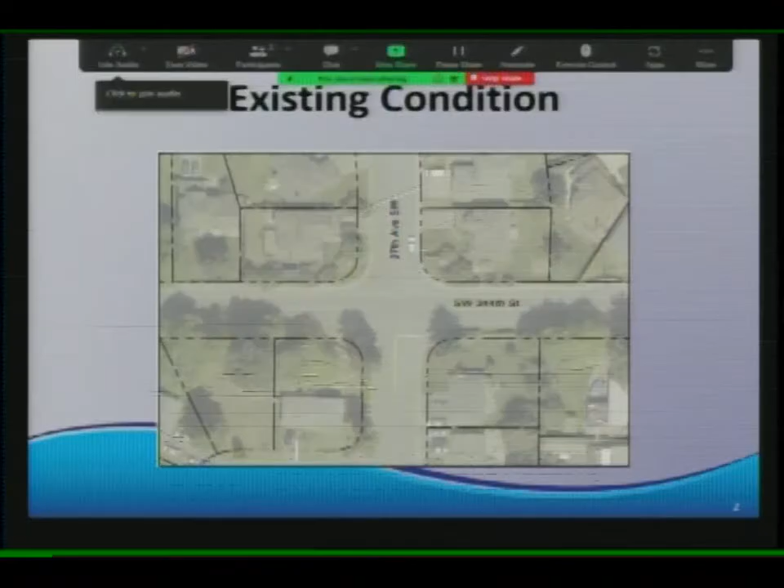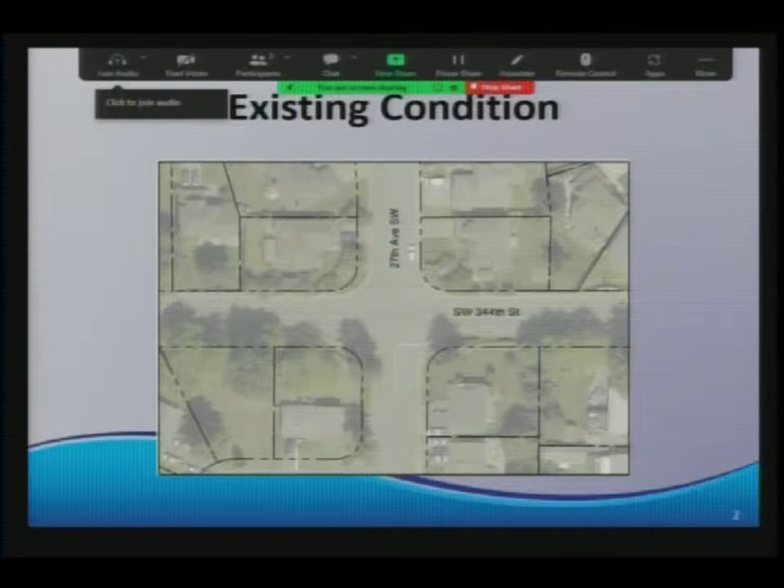This project is to construct a compact roundabout at Southwest 344th Street at the intersection of 27th Avenue. This is our existing condition: east to west, 344th is not stop controlled; north to south, 27th Avenue is stop controlled. We have a lack of marked crosswalks. We do have wheelchair ramps, but they're not ADA compliant as it stands today. We also have one street light, making visibility at night rather difficult.

This is our proposed condition. The very first thing we notice about the roundabout is the chicaning of the travel lanes, which will help slow down and control vehicle speeds entering the roundabout from all directions. We have marked crosswalks, compliant wheelchair ramps, and we also plan to add street lighting to increase visibility of the intersection at night.

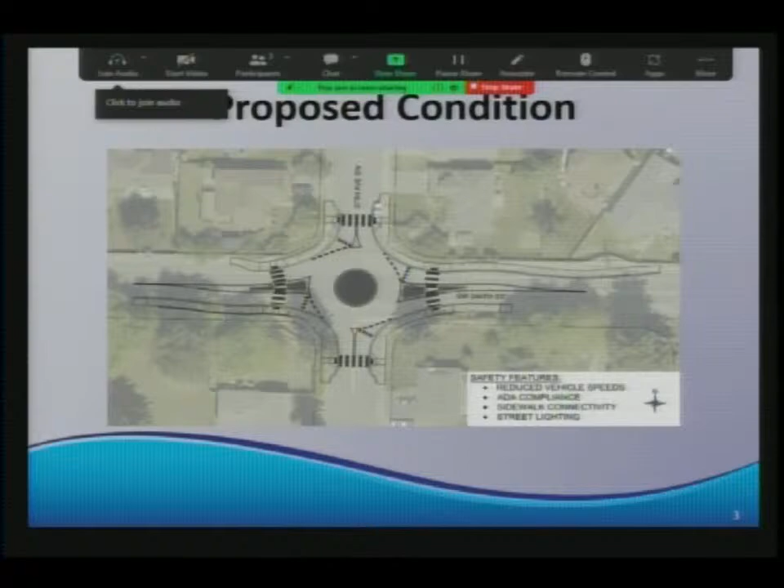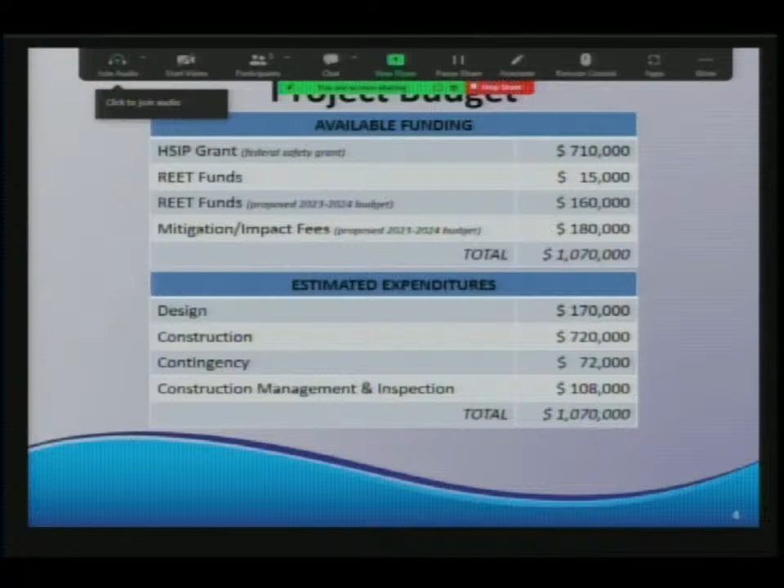This is our current project funding. We have funding from various sources identified here, but mostly we are funded through a federal safety grant on this project. At this time, our projected budget and estimated expenditures are all in balance and in line. Are there any questions?

Council, any questions? No questions for me, only the suggestion to speak into the mic a little more so we can hear better. Okay, we'll bring the mics up. Thank you. Do I have a motion?

I do have a question. Omar, assuming the full council approves completing the design and authorizing the bid, when are we going to do this construction and complete this project? Absolutely, yes. Our current schedule would be to spend the month of December gaining WashDOT concurrence to advertise, then spend January getting all the final pieces put together. We have an ad date of February 10th and opening bids March 3rd. So we'd come back to April LUTC for approval to award, and from then it usually takes about a month to turn the contract around. This would be something we'd see for summer 2023 construction, May-ish.

Okay, thank you. Any other questions from anyone? Okay, is there a motion? Mr. Chair, I move to forward option 1 to the November 15, 2022 consent agenda for approval. Is there a second? I second the motion. Okay, it's been moved and seconded. All in favor, please say aye. Aye.

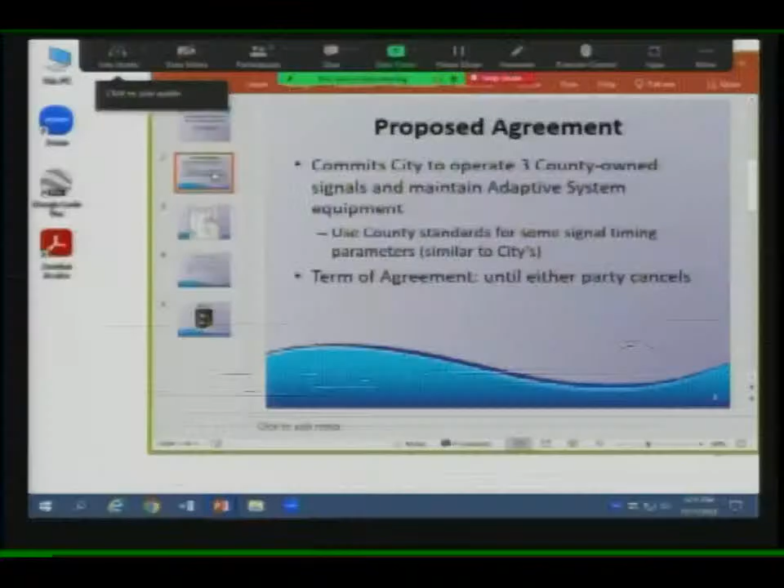Yes, so the topic there is that we have finally reached agreement with King County on that project. And so basically, we would be taking over the signal timing and maintaining the equipment associated with the adaptive signal system at these 3 locations.

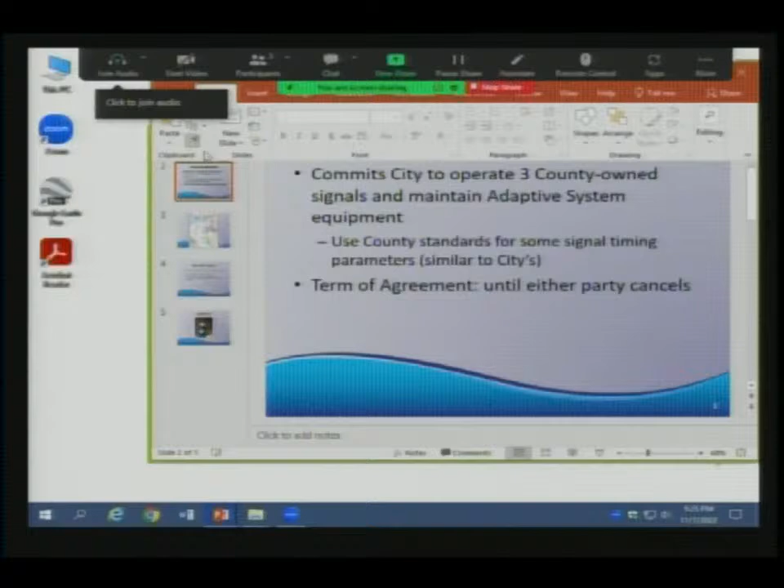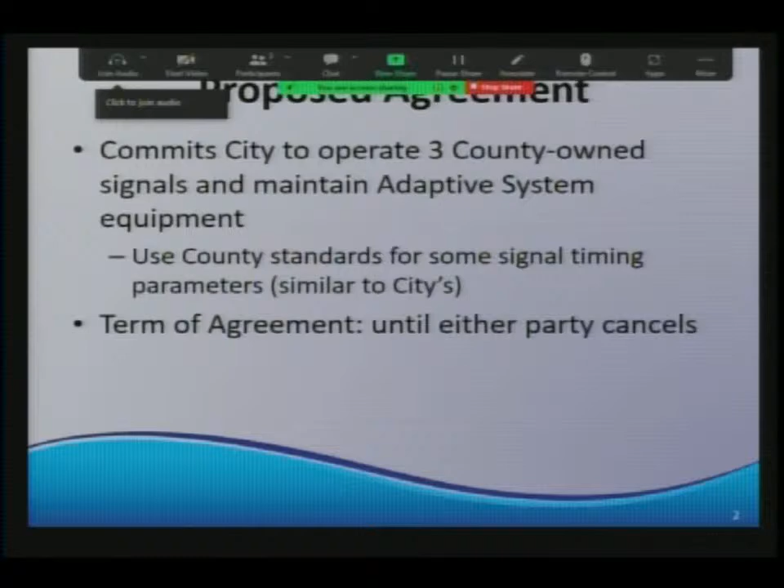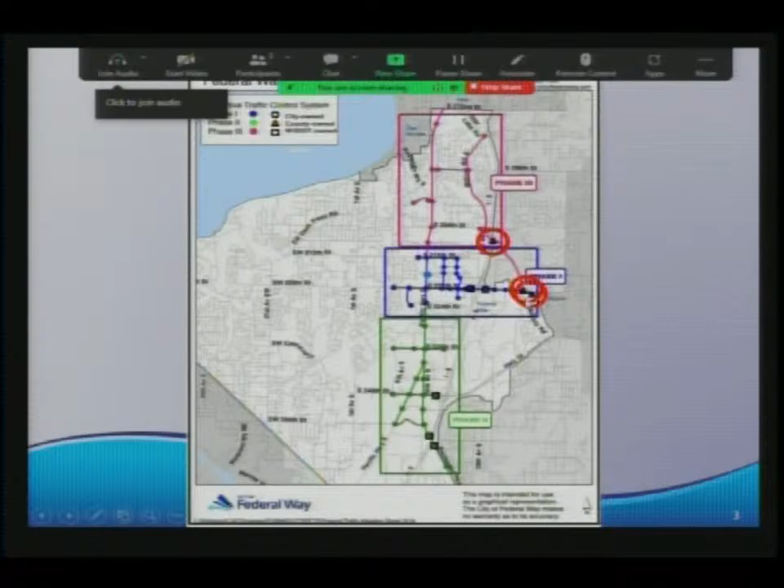The project was already approved in the transportation capital budget. The annual operating costs are less than $20,000 a year and are already included in the traffic maintenance operating budget. With that, I'm happy to answer any questions.

Any council, Deputy Mayor Honda? Thank you. Are King County standards different than ours? They're virtually identical. We calculate the yellow and all-red times slightly differently, but we'll continue to use theirs, so there won't be any changes noticeable. Other than that, pretty much the same stuff. All right, thank you.

Okay, any other questions from any council member? And this will speed up the traffic flow through our city? That is the intention, that we would be able to improve coordination that would continually adapt to whatever traffic conditions were at the time, as opposed to operating pre-designed signal timing plans.

Okay, is there a motion? Mr. Chair, I move to forward the proposed agreement to the November 15, 2022 consent agenda for approval. Is there a second? I second the motion. Okay, all in favor? Aye. Okay, thank you very much, Mr. Perez.

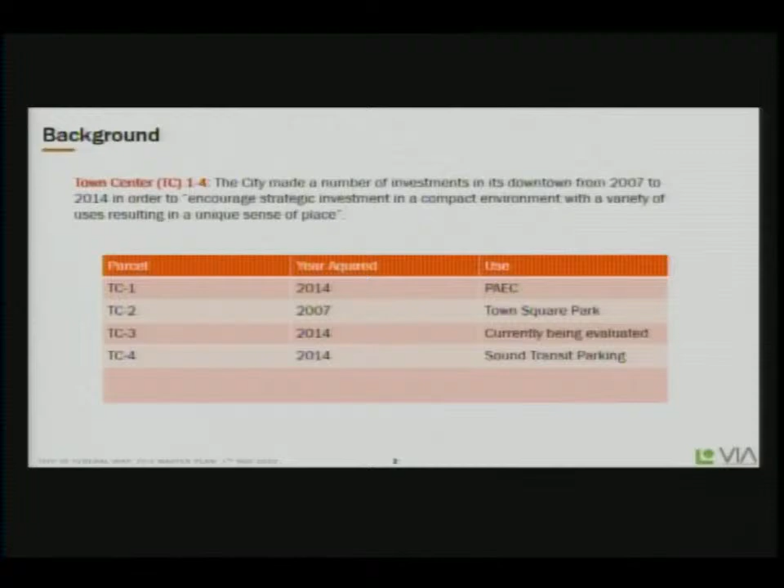So the project goal when we set this up was to develop a plan for TC3 informed by conversations with the community and the economic realities of the development market in Federal Way. What we wanted to do was blend what the community wanted for this property with what was marketable, so that we'd be ensured that whatever we put on the table, somebody would take advantage of it and build. So step 1, the city sent out requests for proposals in February of this year to find a consultant to prepare a master development plan for TC3. Council President Kochmar and Deputy Mayor Honda both sat in on those interview panels.

We had some great responses, and ultimately came to step 2, where the city hired Via Architects of Seattle, who partnered with Leland Consulting from Portland, which provided the market analysis to help ground the preferred plan. Step 3, city staff hosted community engagement efforts to ensure the community's vision was represented, and we fed that information to Via. Step 4 was sharing the preferred plan with the council, which is what we're starting this evening.

So, the staff-led community outreach: we were at 2 Saturday farmers markets, Red White and Blues 4th, Kiwanis Salmon Bake, Planning Commission, Council Downtown Ad Hoc Committee, Comp Plan Ad Hoc Committee, Lions Club Make Music, Chamber of Commerce with 2 presentations, and it's been up on the city's webpage, our community outreach platform, Engage FW.

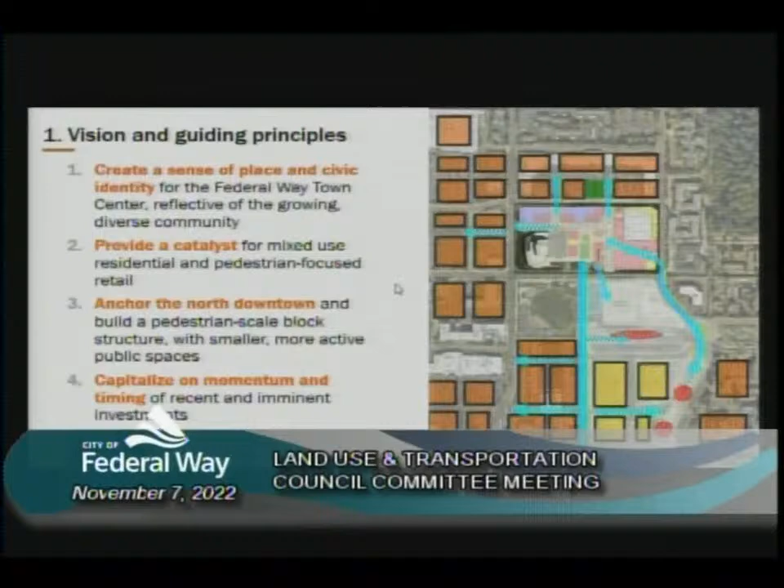Going back to the point Keith made about the sense of place, that's really where we started. Having a vision and guiding principles is so important for any development, but particularly for this one. The diagram on the right shows that while this is the parcel, it's really about looking not just at the parcel inward, but also outward — how it fits back into the community and how it can create a place. Part of that is also the identity: what is the civic identity we want for the town center that can be reflective of the community?

This also represents a very interesting opportunity to catalyze everything around it, not just the project itself. Those orange squares represent blocks which are potential development sites in the future. We quickly discovered that if you do it right here, you can set the bar higher for everyone else around you. As the city evolves, great projects and great public assets will be part of the future. Further, the idea is that you're getting a tremendous investment with Sound Transit's light rail system coming here, and this would be the northern anchor to your downtown.

And the mall would be the southern anchor, with 21st being what could eventually be a very fantastic high street, or the most traveled pedestrian street in town. So it's really creating the place that isn't there right now, but also leveraging what is coming with the light rail system. That's the last principle here: capitalizing on the momentum as well as the timing.

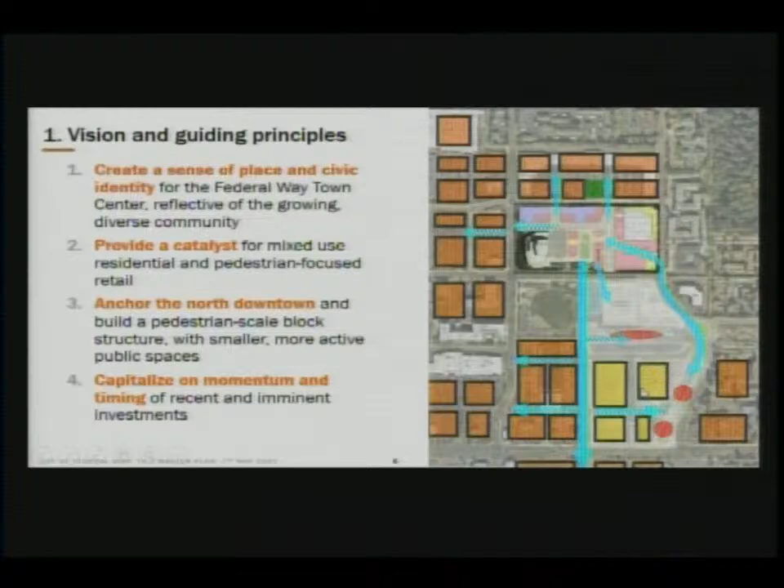It's not just, as Matt mentioned, the Sound Transit system, but also a lot of new developments coming in. There's momentum right now, and we want to make sure we capture that recent investment along with the timing of the station. The yellow blocks here show the Sound Transit parcels and their development, so we really want to make sure we link the two.

We've looked at a variety of land use examples. One comment that has come up over and over from the community is the desire for a farmer's market or a community gathering space. That could be a flexible event space, a plaza, or a variety of different things we explored, really to make sure there's a place for people to gather.

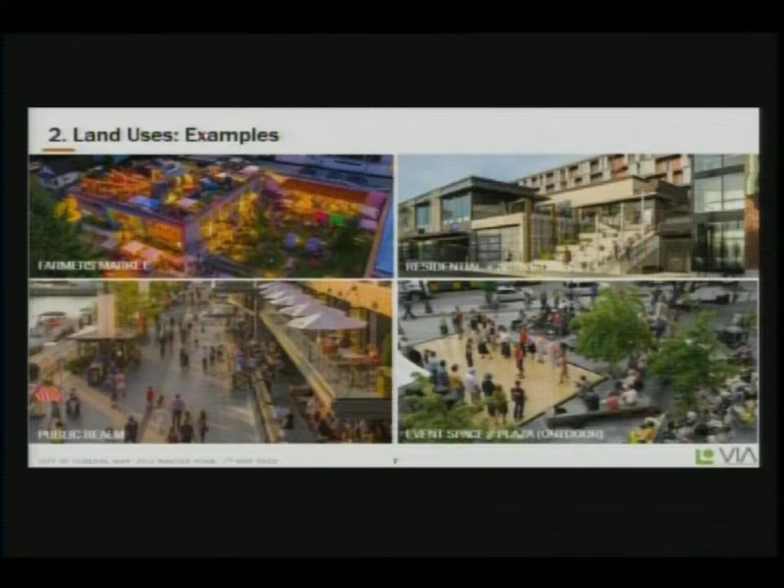In addition, a need that came up over and over, supported by the market, is residential—making sure the community can be right there, along with activities on the ground floor to activate the spaces. That's where having a really important public realm comes in, which is really just places for people. It's streets, but making sure people can walk and wander around. So it's really about creating the place.

One idea we wanted to share is that every city deserves a really great town center. Now, I know you have a park called Town Square, but that's more of a recreational facility. This place gives you the opportunity to create a civic town center. In the traditional sense, that would be like a village green with a church on one end, maybe a civic building or city hall on the other, lined with everyday market uses and retail. That's what we're envisioning here—a place to gather as a town center, a place to call the heart of your community.

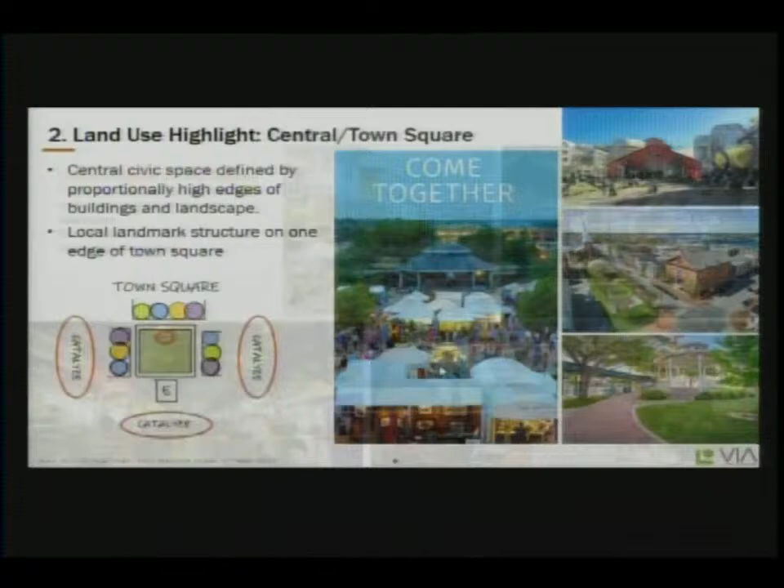Going back to another opportunity here: food. Talking about the growing community and the diversity here, food is a reason to come together, and that's something we've found in many communities. We work for an international firm, all over the country and outside, and we're seeing more and more of this opportunity for people to gather, having a public space or a market that's the heart of that North Downtown. We also want other active uses facing that public market that can be complementary. It doesn't necessarily have to be a public market—that's one idea—but some version of a community space, with food as one really great opportunity.

We looked at a lot of different typologies of development that can help activate this area, and different scales of residential intensity. We don't think the one on the left, the two-story townhouse, takes full advantage of the opportunity here. So we're thinking something more dense—4, 5, 6, maybe 7 stories—as the type of development that could come here and really activate the place, as well as give the economics a chance for something to catalyze the whole downtown.

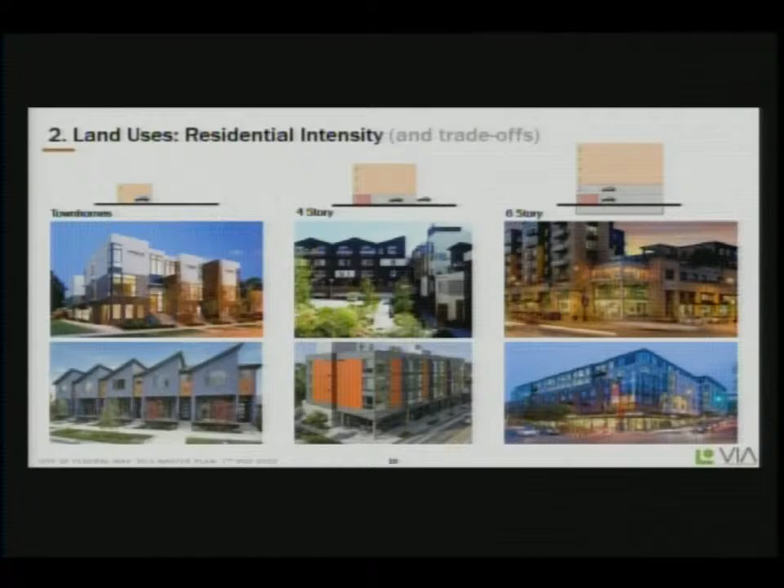We've also considered employment. The market isn't as strong for employment, but we aren't just talking about today—as Jack Dovey mentioned, this is a 20-year plan. We'll talk about phasing in a little while, but we're looking at other uses, whether office, hotel, or some kind of civic use, with the opportunity for them to front the public square and help create a space that's active for more hours than just one. So not just residential, but also the ability to integrate parking to really use that as a resource in the evenings and in the daytime.

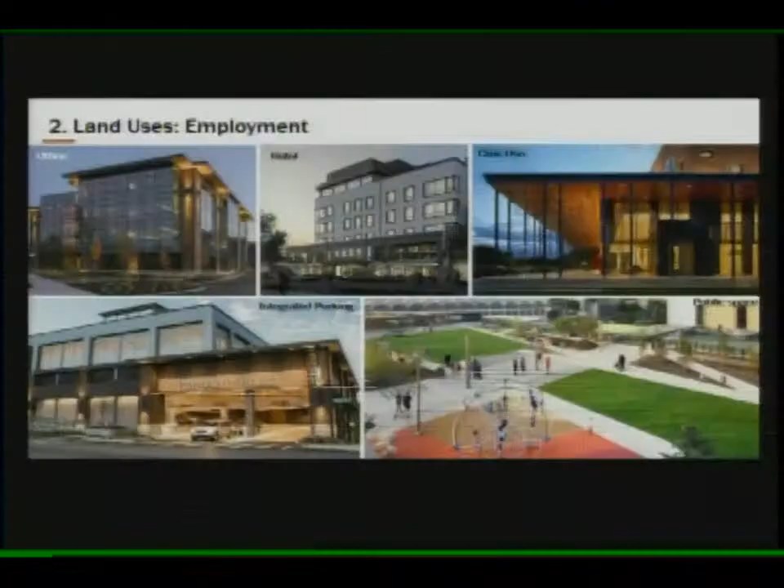Okay, we want to look specifically at the 7-acre parcel we're working with. I think everyone knows where it is. It's next to the PAEC, Performing Arts Center, and it's a blank slate to speak of right now because it's mostly a parking lot and an empty retail one-story building.

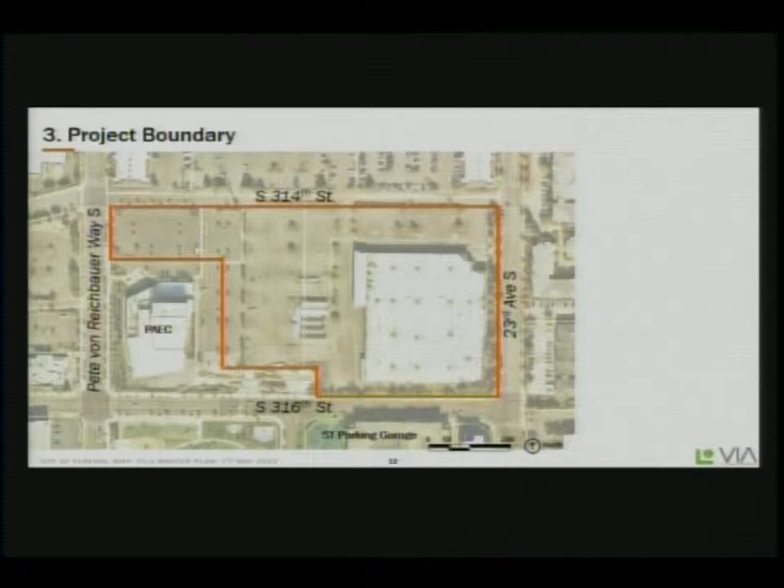And I think, is everyone familiar with the term stramp? That's the walkway that's a ramp and a stairway that goes up right off 316th. We will use that term, the stramp, just because that's the name urban designers give that type of thing.

So we developed a framework of how to create development parcels here that could surround and enhance that heart location we're talking about. So also at that heart location, we can create a landing, a real nice open space that's open and visible from looking up 21st Avenue.

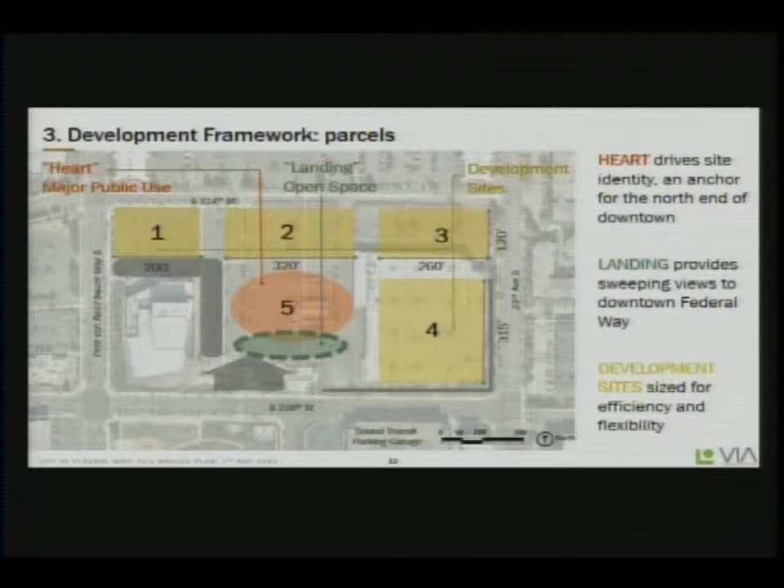So we have this framework of 4 development sites with that heart location in the middle. And next, we looked at how we would access it with automobiles and pedestrians, and make a nice street grid, because with your big street blocks here in Federal Way, we have to carve them up to make them more urban and more accessible in the interior. And that helps manage traffic better when you can have more routes through these big blocks.

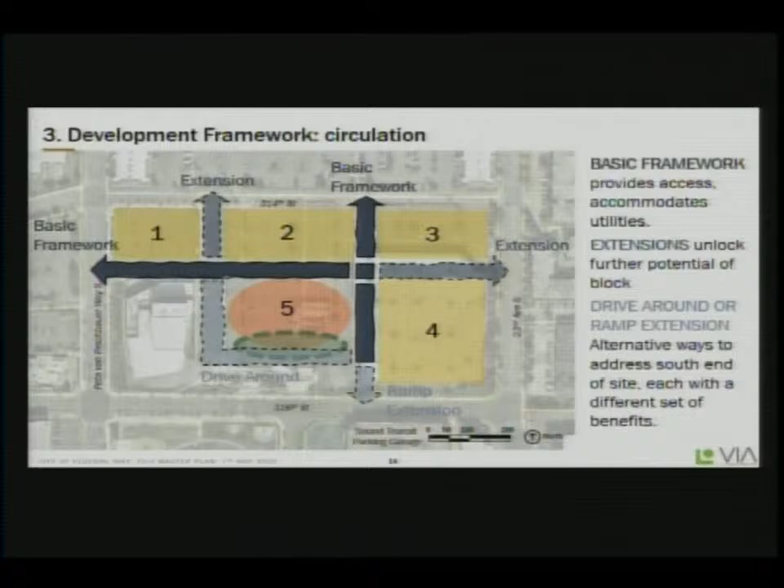And then looking at how to apply the development framework and activate the ground floor. The heart area, framed in red, is where we can see different types of retail activation, where the yellow areas around the perimeter would be something that would be a different kind of activation, but more based on the surrounding community.

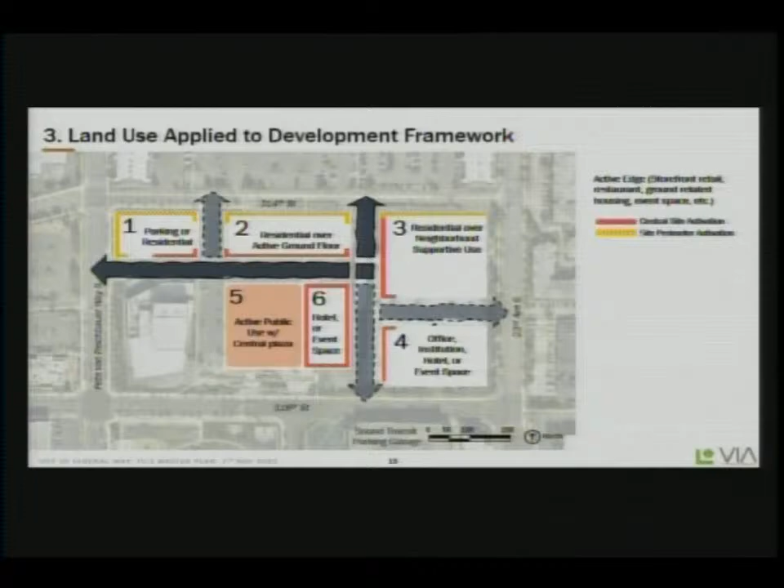So just before we go there, we are going to focus on the preferred alternative. We did consider a variety of alternatives. We landed at 3 different alternatives, 3 different ways of movement, and a little bit different with the parcels. And then based on all the feedback and input, we have a preferred alternative, which is what we'll spend today on.

So in developing an alternative, we have to keep in mind that this is a framework and a criteria that we're setting forward that a developer or a series of developers will work with the city and negotiate more details than just this. So we're setting up what we think is possible and feasible and reasonable, and this is just the first step in actually achieving it.

So when we came to a preferred alternative, we did use that heart location as the town square with a civic pavilion, which could be an event space, a farmer's market, a variety of things, maybe something quite flexible. The flexibility would come in its use during different days of the week, on weekends and at night. So it can be that civic place where people gather, the very interesting place that everyone wants to go to on a regular basis.

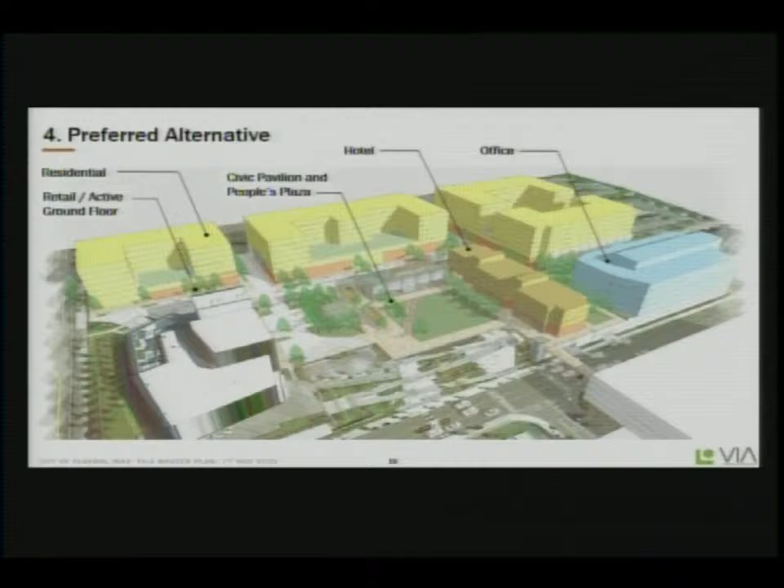So as I mentioned, we use the word Acropolis, which is what you have in this circumstance when you look up 21st Avenue. The stramp creates a very nice platform to have all this activity happening. And I think if you can see it 3-4 blocks away, it announces itself with a lovely landmark sign, something like the Pike Place Market has. So you can see it from quite a ways away, and you just know that that's a destination.

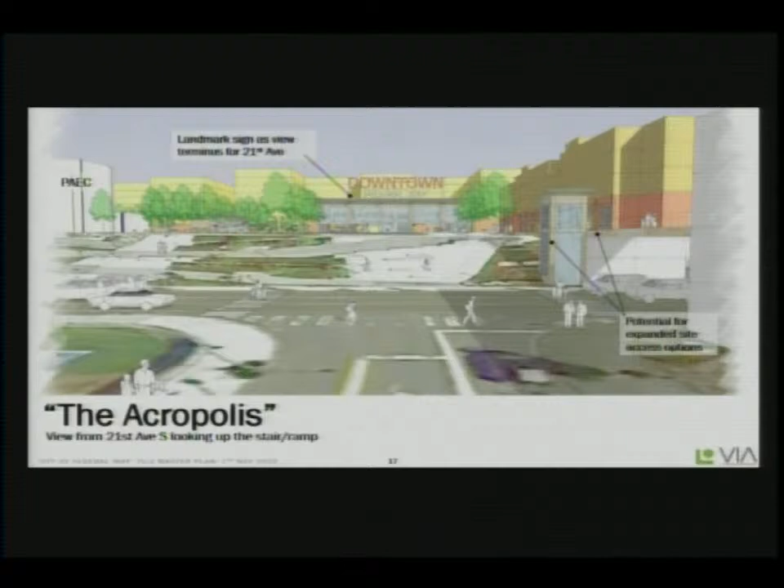And so it will be the lifeblood of downtown. There's also the opportunity to connect it with the Sound Transit parking garage, if that can be negotiated, and also find an accessible route with an elevator to bring you down on the right side, down to 316th. So we want a lot of pedestrians walking up and down 21st and finding their way back and forth to this north anchor to downtown.

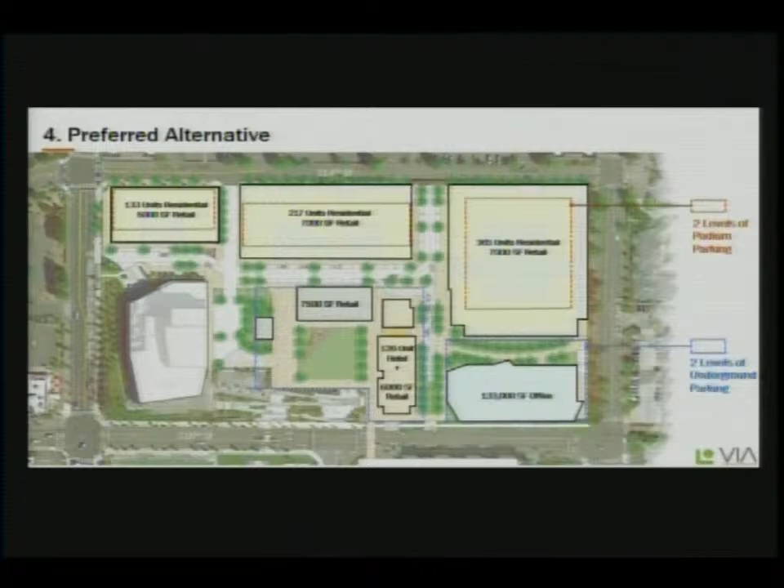And then structured parking either embedded within these buildings or underneath, including the opportunity to supplement the PAEC's parking under the town square. This is just another view looking from the east up at 23rd Avenue. There could likely be a pedestrian way between the blue office building and the yellow residential. And we lined that street with townhouses with entrances as a nice way to activate that and keep eyes on the street.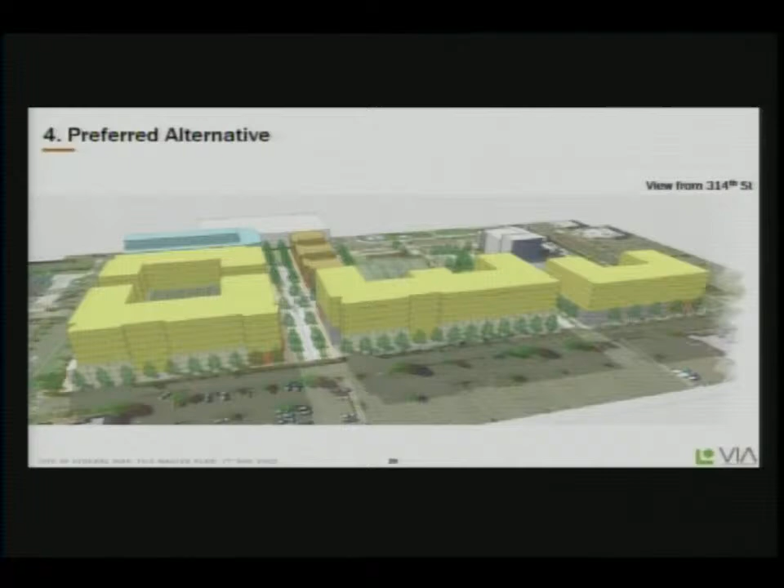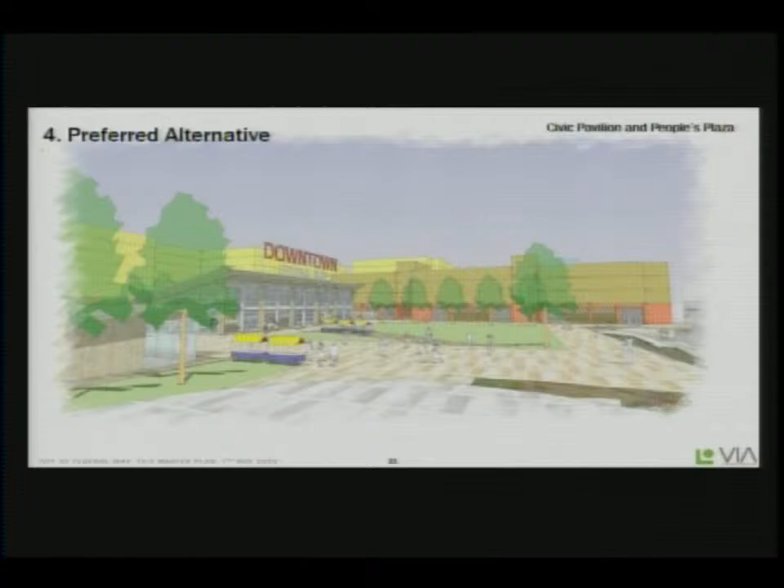And this is more of an eye-level view down at the public space, the town square, where you'd see that event center, or it could be a retail space. The brownish building in the background could possibly be a hotel with lots of restaurants and active retail fronting that. And as I was mentioning earlier, this could be populated with tents during certain events like farmers markets or craft fairs or book fairs or other kinds of events during different times of the day and week.

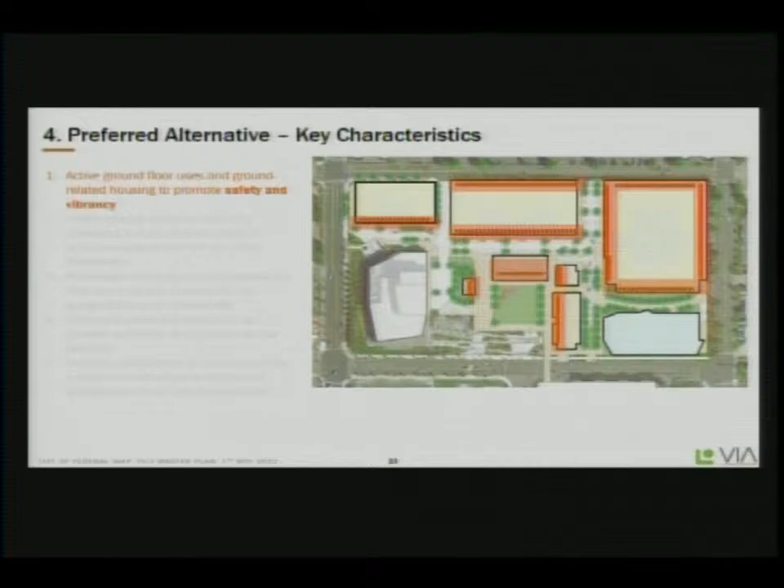Yeah, and just to add to what Matt was saying, a few key characteristics. We mentioned the criteria, the reason why we want to do something like this, but making sure those active uses really link back to safety as well as vibrancy, making sure there's activity around here, but also a sense of eyes on the street because people are moving around. We really want to create a safe space, contrary to some of the drug-filled park things we've been hearing about. You really want to have people here so that doesn't happen.

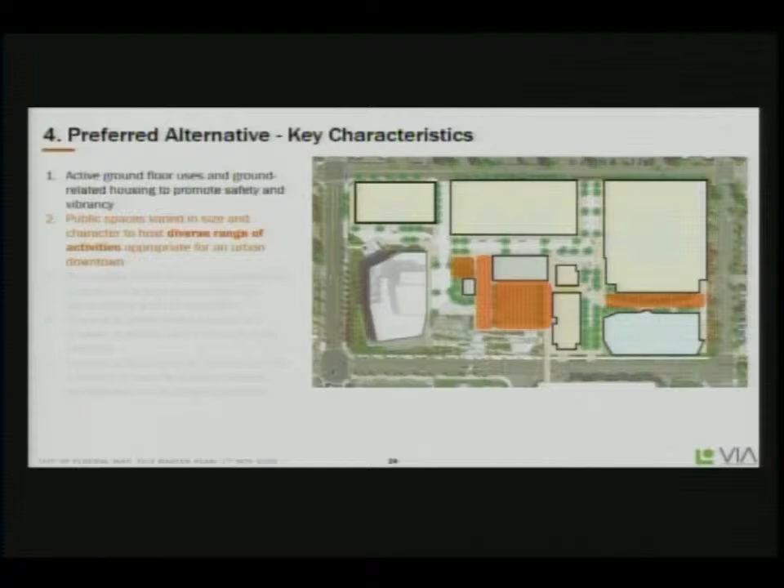Also thinking about the variety of uses we want here. As you think to the future, the thing we found over and over is spaces need to be flexible, because you just don't know. A few years from now, you may want to do something else, activities might change. So making sure you have a variety of spaces that are diverse in character really helps with that momentum and ensures they'll be functional for whatever use might happen.

Going back to the pedestrian-first design we've talked about, we've sized the blocks more to an urban scale to allow people to wander around, and making sure there's a lot of accessibility from both within as well as outside, for both people as well as cars, making sure we have a bit of both.

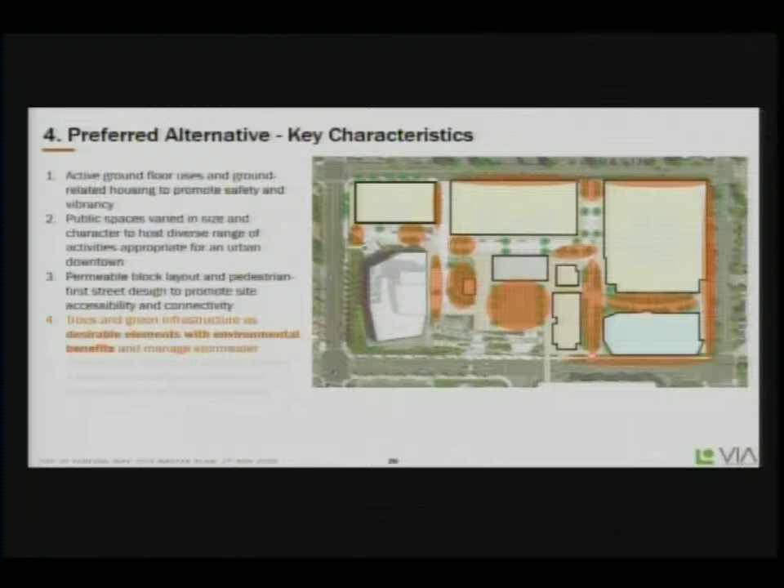And then also, going back to environmental benefits, trees as well as green infrastructure are desirable elements we want to make sure have space here, and also managing stormwater, so it's very much part of the whole plan. And then finally, this is really about bringing activity as well as energy, making sure you have those uses. That's why we looked at a variety of them, because we really want that excitement here. That's something we think is a real opportunity.

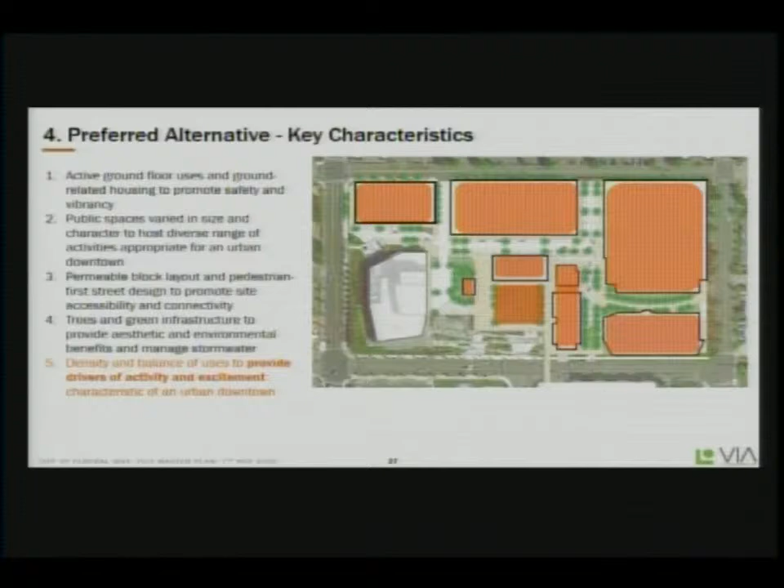And so with that—oh, that's my cue.

Okay, so the policy question in front of the council is, should the city release a request for proposals to solicit developer proposals for the city-owned TC3 property?

And the options considered, the recommendation, and the next steps. Option number one is move forward with releasing a request for proposals for TC3. Option number two would be not to move forward and provide direction to staff. The mayor's recommendation is to move forward with releasing a request for proposals, but that's not going to happen tonight.

Tonight is a setup for our next conversation, which will be the November 15th study session of the City Council. My expectation for that meeting is that we'll spend less time on the plan, although if there are questions we'll do a very brief recap of the preferred plan, but really talk about the next steps.

So what do we expect with the request for proposals? What will we get back from the development community? What are the touch points for the city council along the way? Because there are going to be multiple touch points for the city council before we ever dispose of the property. So with that, I'm going to stop talking and see if there are any questions anybody has for any of us. I'm sure there are lots of questions.

So for north of 317th Street, they're continuing landscaping, noise wall construction, and MSE wall construction through the whole corridor. That includes prepping for the wet season, so a lot of the areas they're trying to stabilize. They've chosen a design for the slope stability issue they encountered north of the city, along north of the proposed Star Lake Station. It's a long span option, so they're working on designing it right now.

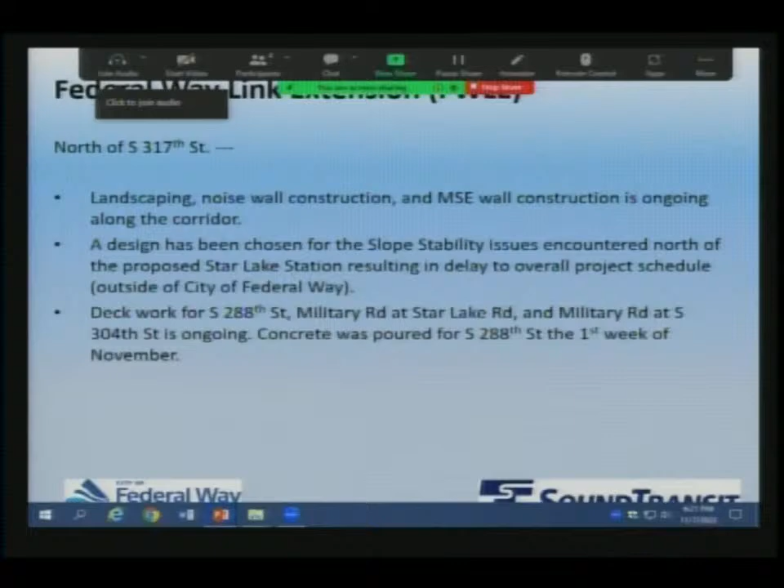They continue to do deck work for South 288th Street, Military Road at Star Lake, and Military Road at South 304th. I've got some pictures I'll show in just a little bit. They poured concrete for South 288th Street last week, the first week of November. For the city center, they poured concrete for the deck over Southwest 320th Street, also last week. They're continuing the landscaping for 21st Avenue South, which should hopefully happen in the next couple of weeks in November.

Early station work is ongoing: canopy steel, electrical work, and construction of the staircases and elevator steel. Construction of the garage is also ongoing, with the first level driving surface poured this week. Utility crossings for 23rd and 317th have been pushed back to the start of 2023, partly to complete permitting with Puget Sound Energy. Construction of the end-of-line facility has also started.

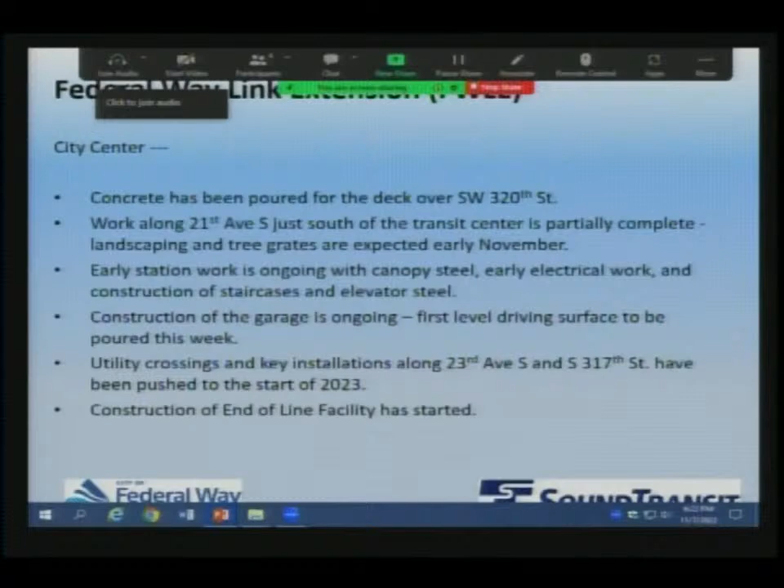So real quick, this is at South 272nd Street. This is drone footage, just a still they took about the second week in October, so it's not quite up to date, but this is roughly how it looks now. You can see they finished their work on the bus drop-off and the parking for Mark Twain Elementary, and they'll be doing the play fields next year.

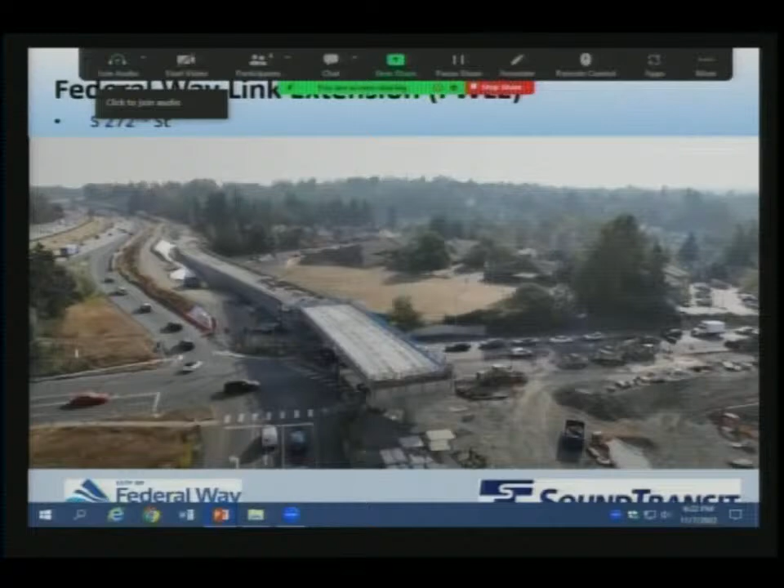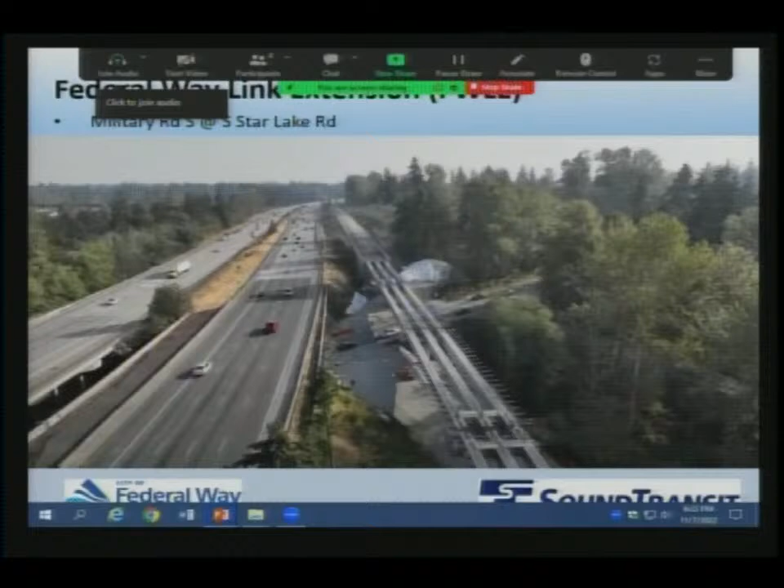This is at Military Road and South Star Lake Road. There are the girders that they erected, and some of the deck work has commenced there, so it's a little further along than this.

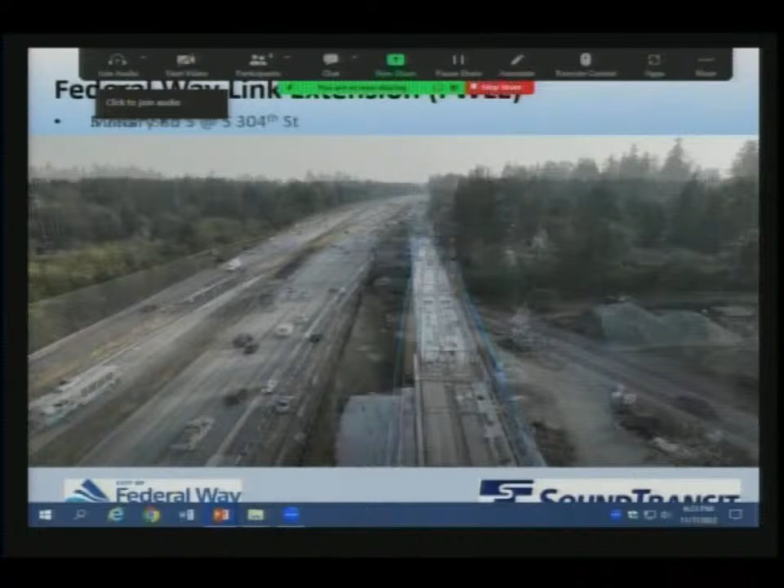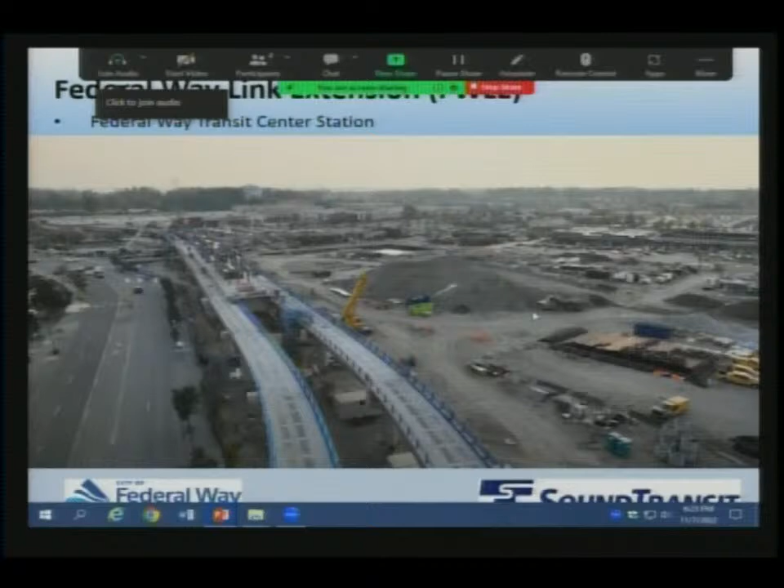Coming into the town center, you can see the station is here in this steel, in this location. There are the twin tracks that come in, and then the girders they put over 320th. They've poured those as well.

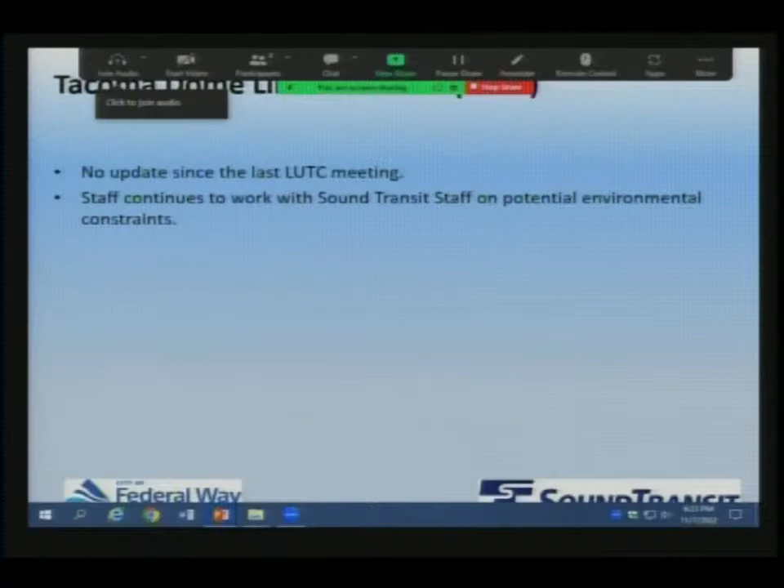As far as the operations and maintenance facility south, I don't have any updates since the last LUTC meeting. We're still working with them on some of their location siting. Similarly for the Tacoma Dome Link, we're continuing to work with Sound Transit staff on potential environmental constraints. I'll answer any questions.

Council President Kochmar asks: is the artwork still being discussed, or have we heard anything?

Yes, last they told me they went back to the artist and he's developing a new design. They gave me a rough idea at the start of the year they might have a new proposal, but there's no concrete date on that. So when I hear something, I'll bring it forward.

Second, with Fife - is that delaying the project moving into Tacoma? The decisions on Fife apparently have a lot of land use issues with regard to water retention. I don't know if they've put a concrete number on an actual delay based on it, but there have been some discussions on the location of the station in that area. Last I've seen, they have a couple of options to move it out of the floodplain that may solve the issue. Yeah, the quicker they can move it forward into Tacoma, it's going to help us, because then we won't be the end of the line, which we don't want to be.

Deputy Mayor Honda: Thank you, I have a few questions. The last time I saw a drawing of what the finished product is going to look like was maybe 2 years ago - is it still the same? Are you talking about the Federal Way Link project? Yes. Yeah, so there have been some minor changes to it as the designs progress, but in concept, yes, it's still the same.